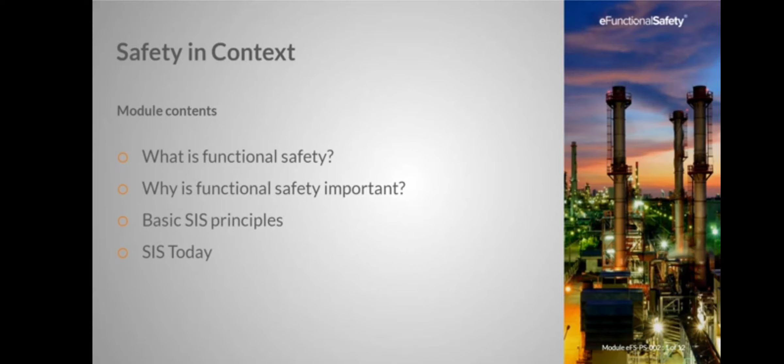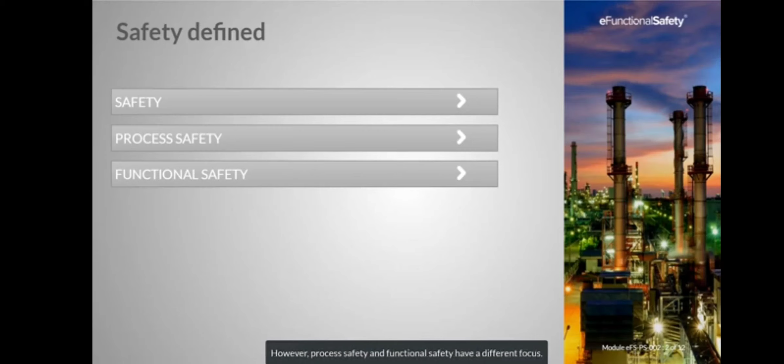The term safety often gets used in the context of occupational safety, namely slips, trips and falls. However, process safety and functional safety have a different focus.

Safety is a general term that has been defined as freedom from danger, risk or injury, or freedom from intolerable risk. It's the condition of being protected from harm or any other event which could be considered undesirable.

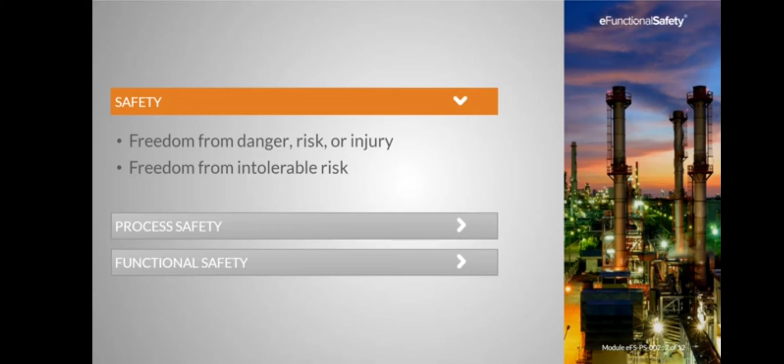Process safety involves keeping the process under control and keeping hazardous materials inside the pipes and vessels. It's a concern of many different disciplines, including process experts, mechanical, electrical, control and instrumentation, as well as safety professionals.

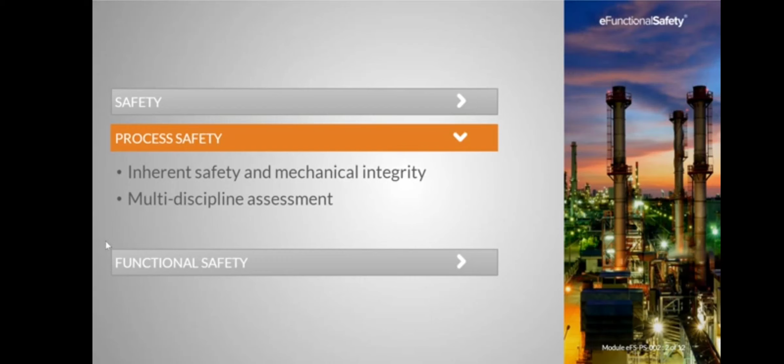Functional safety is essentially a subset of process safety. When hazards occur, the correct operation of automated equipment, such as sensors, logic solvers and valves, should bring the process to a safe state. Functional safety principles ensure that each hazard is prevented or mitigated by equipment designed with the correct integrity.

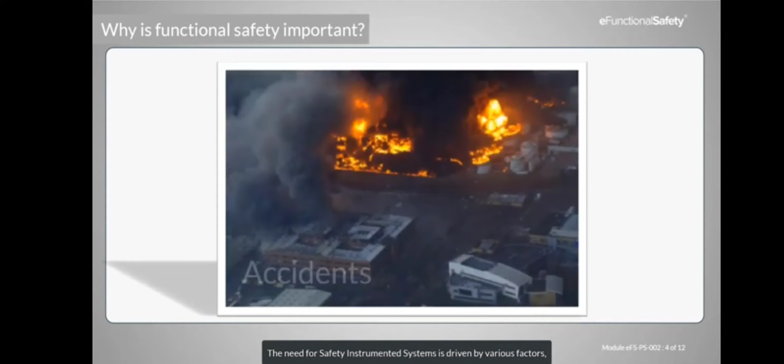The need for safety instrumented systems is driven by various factors, not least of which are process industry accidents, such as the one that occurred at Buncefield in 2005.

Operators of major accident hazard sites look to reduce the cost of insurance by demonstrating that SIS and other protection layers are well designed and maintained.

Standards are a third driver for SIS. Companies and organisations work globally to agree best practices such as IEC 61511, which is the global reference source for specifying, designing and maintaining safety instrumented systems.

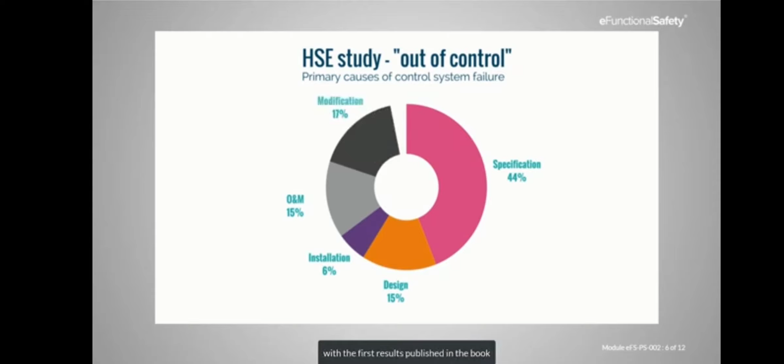A study of incidents involving control systems was conducted by the Health and Safety Executive in the United Kingdom, with the first results published in the book Out of Control: Why Control Systems Go Wrong and How to Prevent Failure.

Although this is just one study, notice that the hazard owner is effectively responsible for setting requirements, as well as operating, maintaining and modifying an SIS after it has been placed into service.

So even if an end user contracts out the design, this research shows that over 70% of problems get introduced either before or after a system is designed and installed.

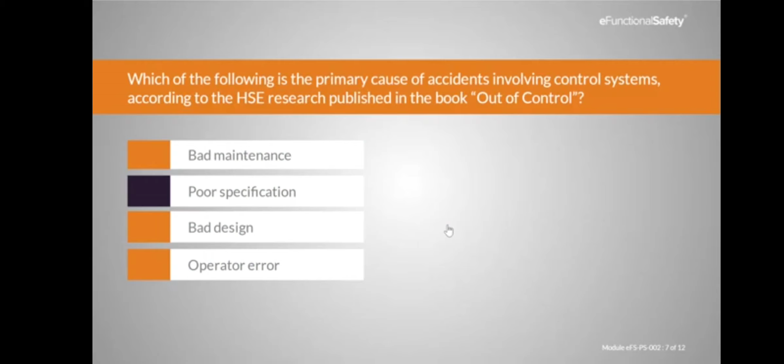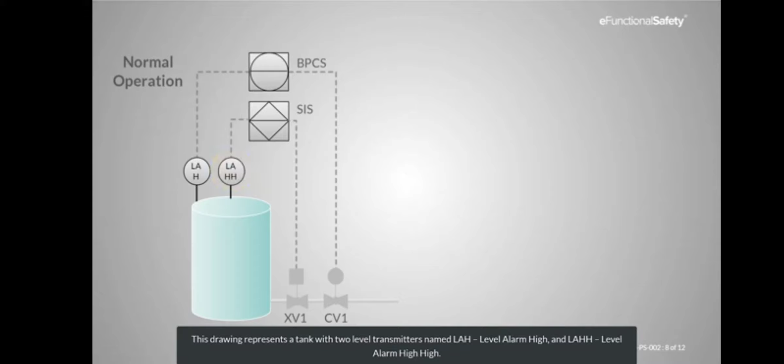Each transmitter is connected to separate logic solvers, one for basic process control, BPCS, the other for safety, SIS.

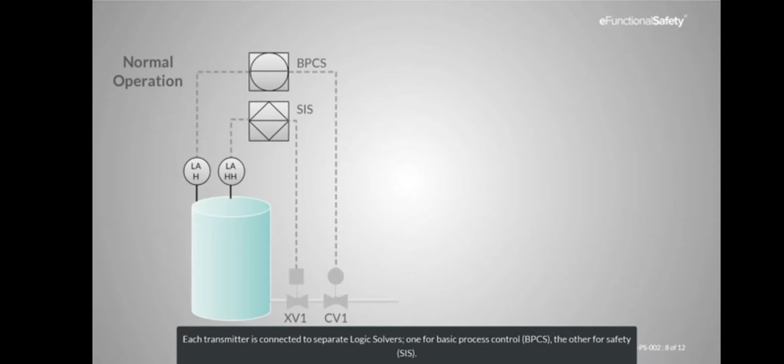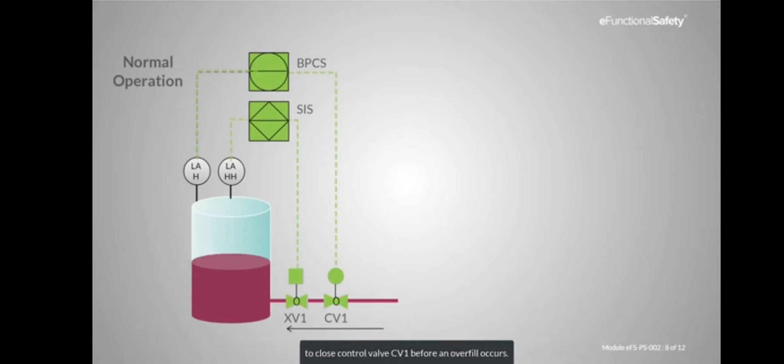If it's functioning correctly, the BPCS logic solver can take an action at the level alarm high trip point to close valve CV1 before an overfill occurs.

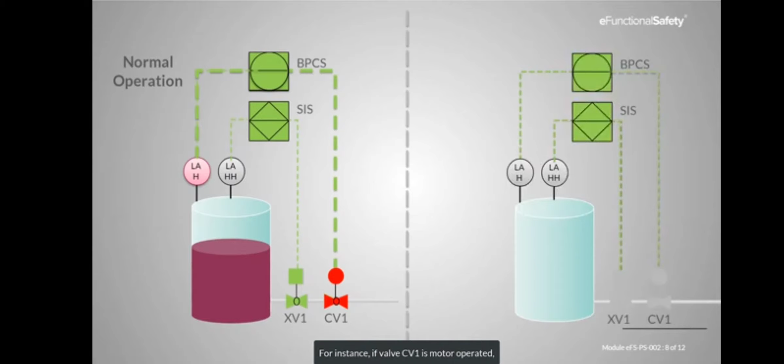The system responds differently in the case of some specific faults that the functional safety standards call dangerous failures. For instance, if valve CV1 is motor operated, a loss of power will mean it will not respond even if a correct signal is received from the BPCS.

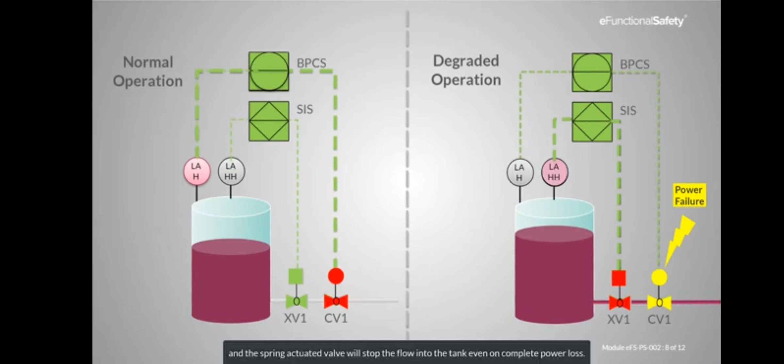However, the function from sensor LAHH through the SIS logic solver to separate valve XV1 is completely independent, and the spring-actuated valve will stop the flow into the tank even on complete power loss.

This is the basic principle of independence in protection layers that the IEC series of standards highly recommends for achieving functional safety integrity.

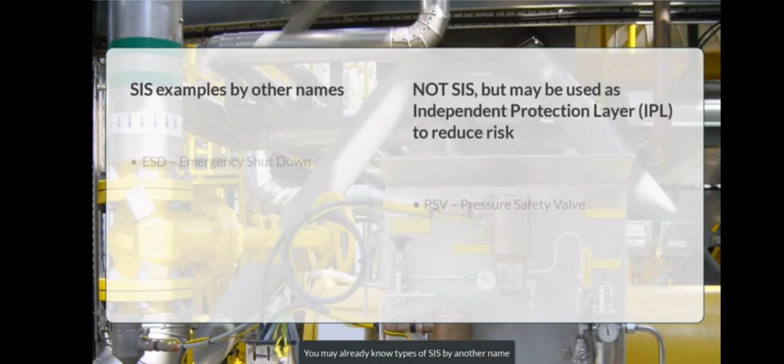You may already know types of SIS by another name, such as the examples here on the left. For some people, the term system often historically referred to just the logic solver element. However, it's important to remember that the safety instrumented system in IEC 61511 includes all the field equipment as well as the logic solvers.

Many other types of protection layer can be used to reduce risk in process plants. These are commonly given the term Independent Protection Layer, or IPL. A SIF is one form of IPL that uses instrumentation.

Non-instrumented IPLs can be very effective and reliable when correctly designed for a given hazard. However, non-instrumented IPLs, such as mechanical relief valves, are not subject to the detailed SIL requirements of IEC 61511 and are therefore not assigned SIL targets.